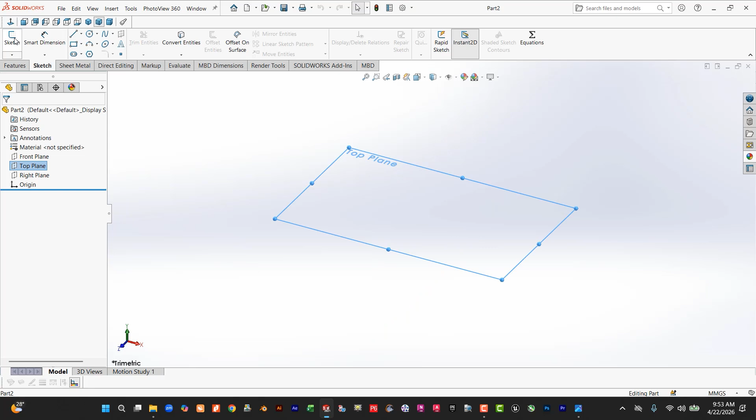Select the top plane, sketch, go to the center rectangle like this, smart dimension, this dimension is 76 and this dimension is 76. Go to the feature, extrude base up to 72.

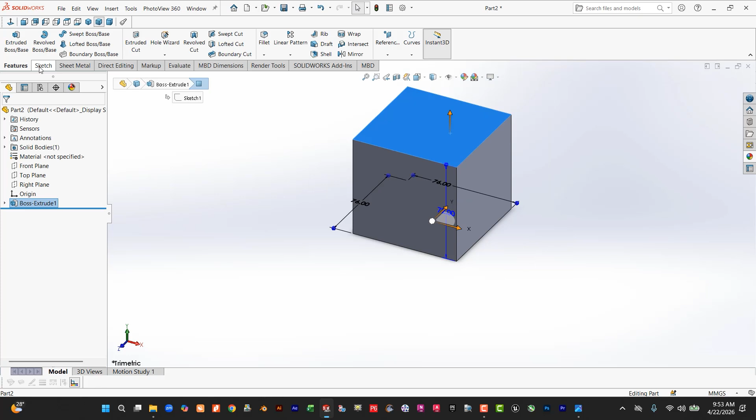Select this portion again, sketch, draw a center rectangle again, go to the smart dimension and this dimension is 50 and this dimension is 50. Go to the feature, extrude cut, blind to through all.

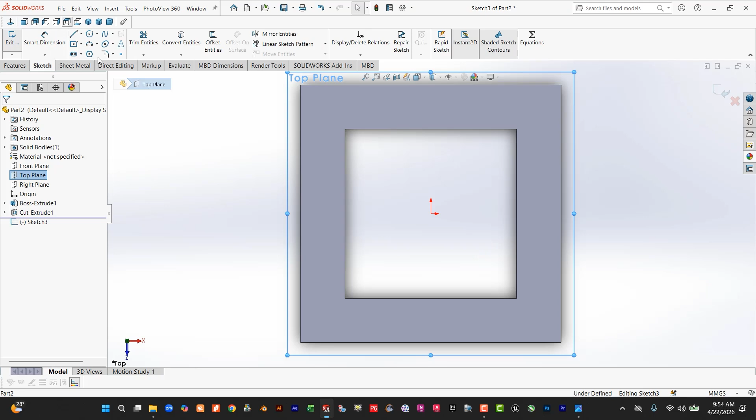Top plane again, sketch, select the line like this and we have to make a curve like this. Select this line and make it horizontal.

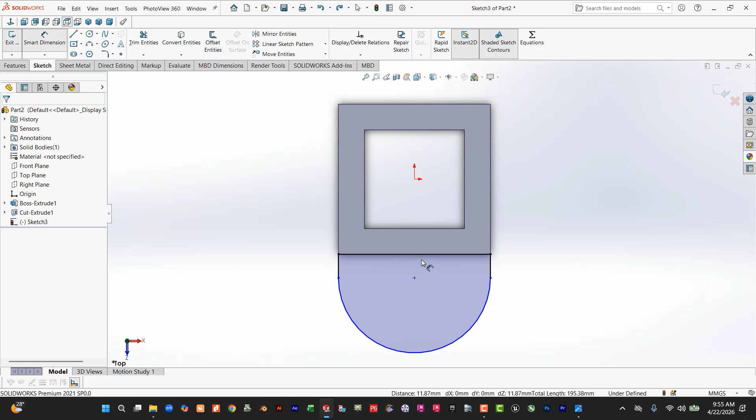Select the line again to make it fit. Go to the smart dimension, the distance from here to this end is 56. Go to the feature, extrude base, extrude up to 18, and this is my result.

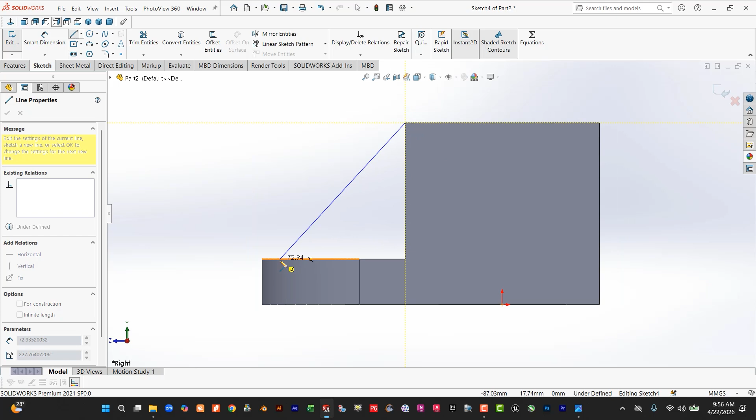Select the right plane, sketch, select the line from top up to here, something like this. Smart dimension, the distance from this end to this end is 4. Go to the feature, extrude base, up to 22, and blind into mid plane.

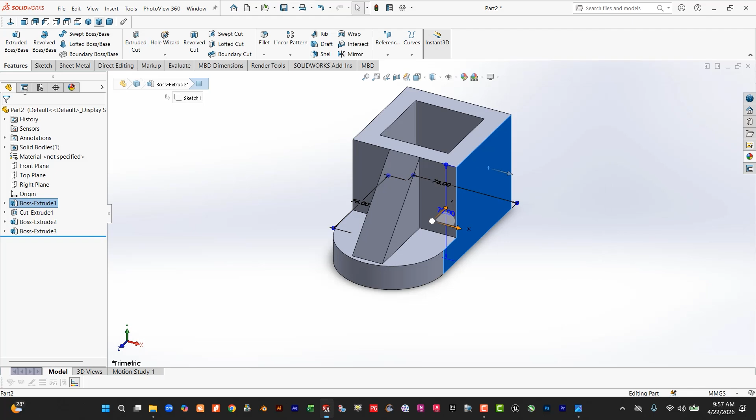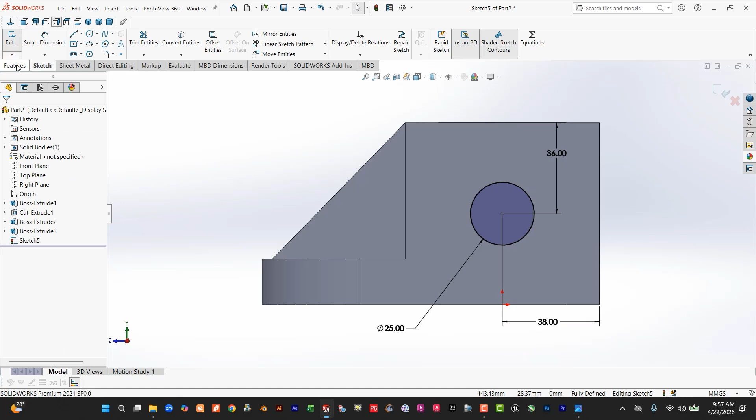Select this portion, sketch, draw a circle, smart dimension, and this circle is 25 dia, and the distance from the top is 36, and the distance from the side is 38. Go to the feature, extrude cut, so blind into through all.

So the 3D model is ready. Go to the appearances, so we use the plastic, and this time we will use yellow again. So our 3D model is ready.